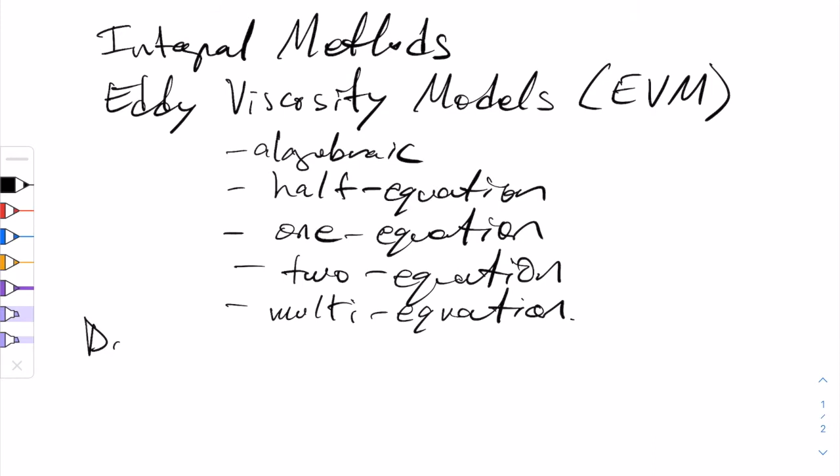Then there's a whole class of differential Reynolds stress models. And sometimes we might say there are algebraic ones, but we're not going to talk too much about that.

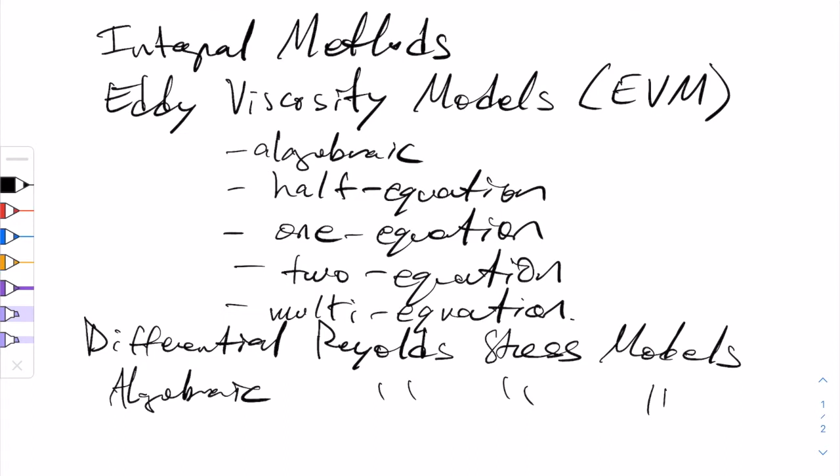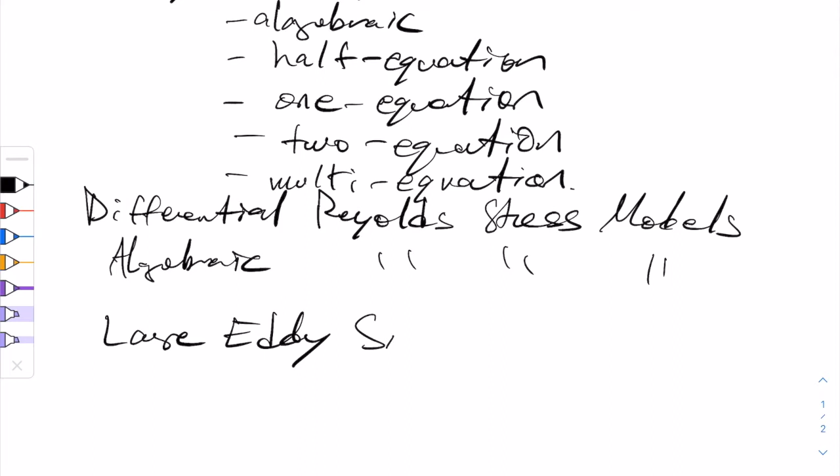Opposing these types of Reynolds-Averaged Navier-Stokes closures, there's a whole other class of models, which we'll lump into large eddy simulation. And of course, there are direct methods, numerical methods where there's no modeling—we just directly solve the Navier-Stokes equations. Those are called direct numerical simulation.

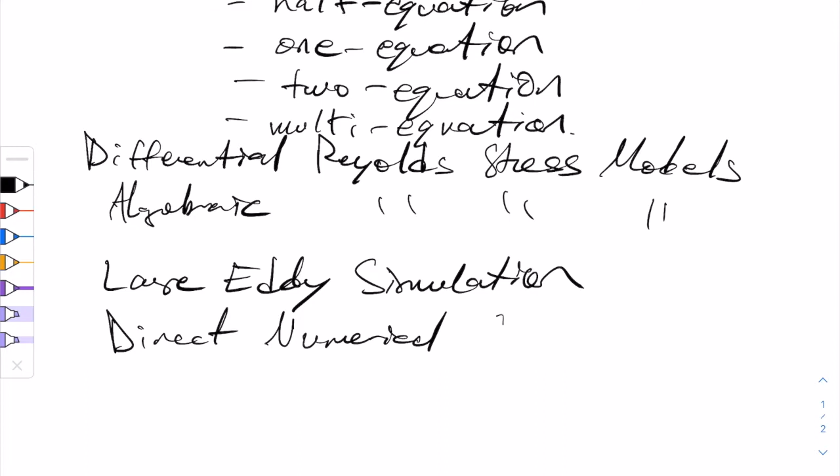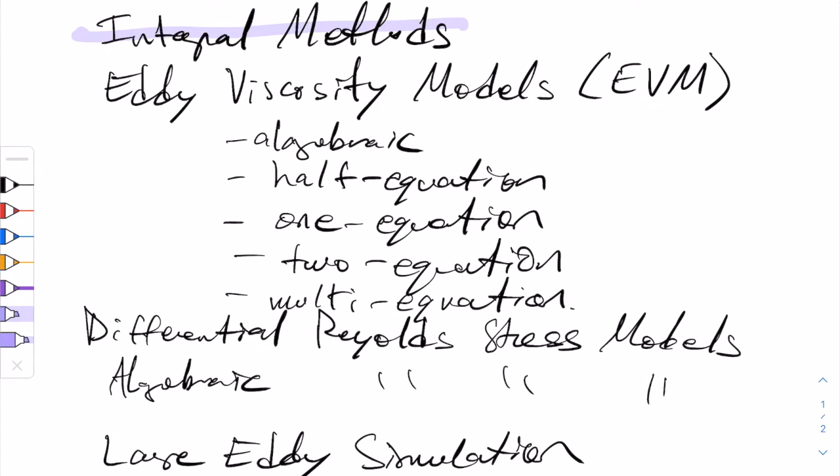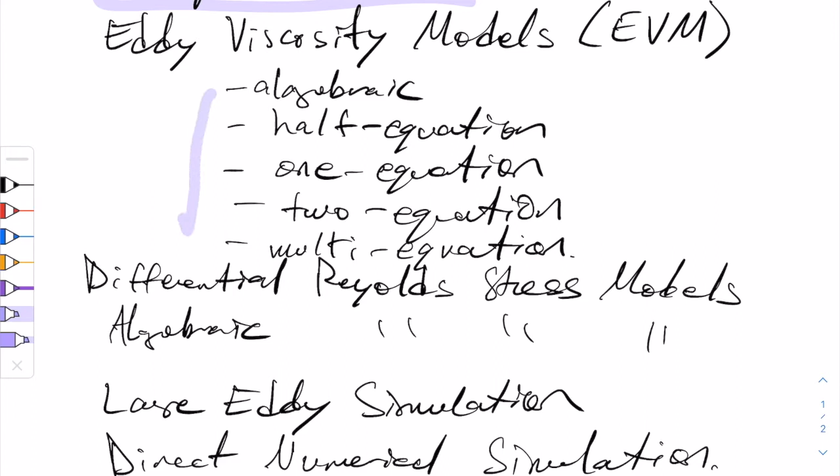Generally, in order of complexity, the integral methods are the least complex and run very fast, even on something like a small calculator or pocket phone. They become more complex as you go down the list. The Reynolds stress models are more complex than eddy viscosity models. LES usually requires supercomputers to run, and direct numerical simulations certainly need a very large supercomputer.

So let's talk about each of these a tiny bit to give you an overview, and in future lectures we'll show some of the mathematical details.

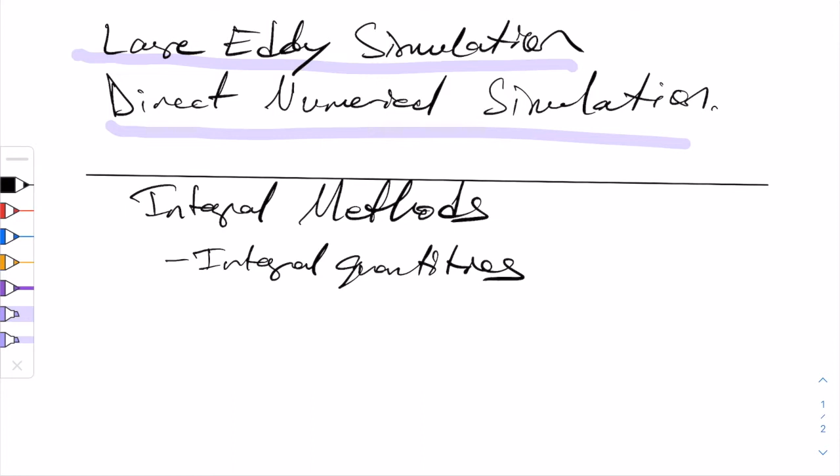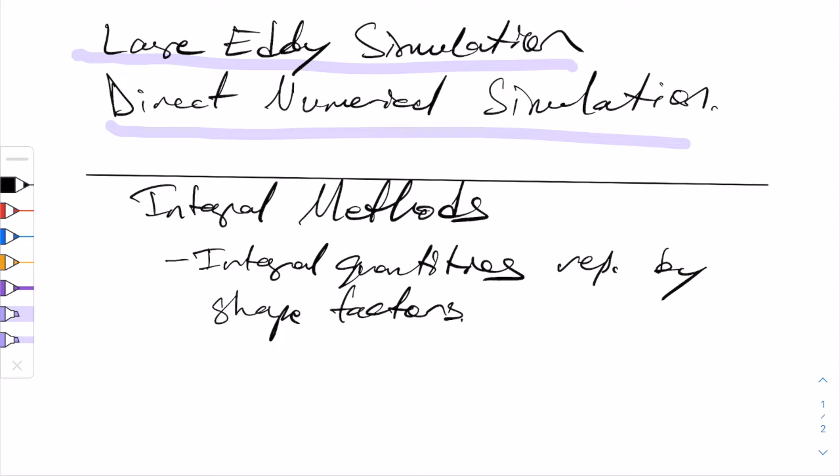So the first one is the integral methods. These are generally the most simple methods, and they do not explicitly cover the variations in turbulence across, say, a boundary layer thickness in boundary layer equations. They usually make use of integral quantities, which is where they get their name, and they're represented by shape factors. For those of you who've been through a traditional aerospace engineering course, you'll recognize the idea of shape factors.

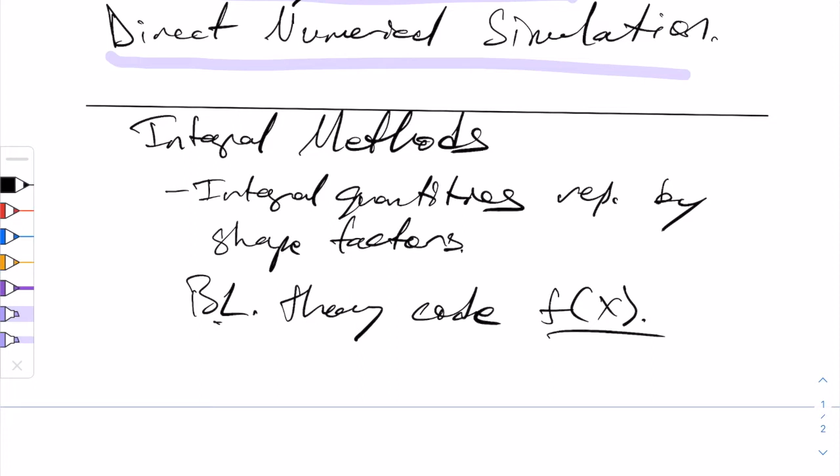They've even made their way into traditional boundary layer theory. The shape factor, like in a boundary layer theory code, will usually be a function of streamwise position, x. In this way, our traditional partial differential equations, which we derived earlier, like the RANS equations for particular flows and turbulence statistics, are replaced by ODEs—taking the PDE system and replacing it with an ODE system.

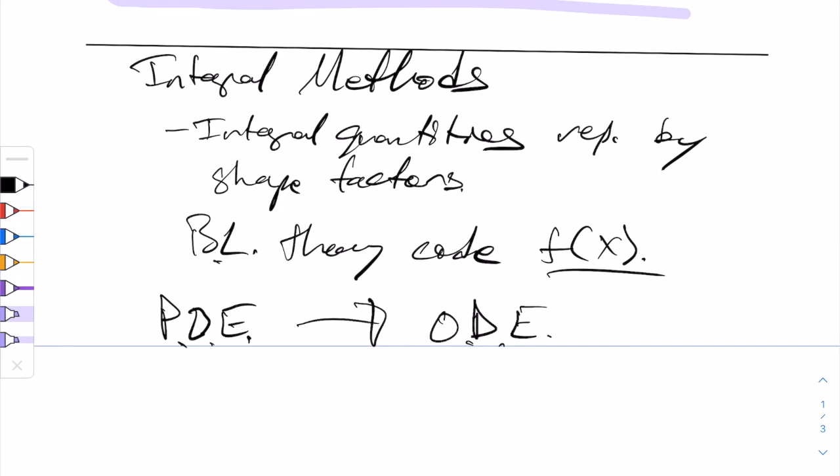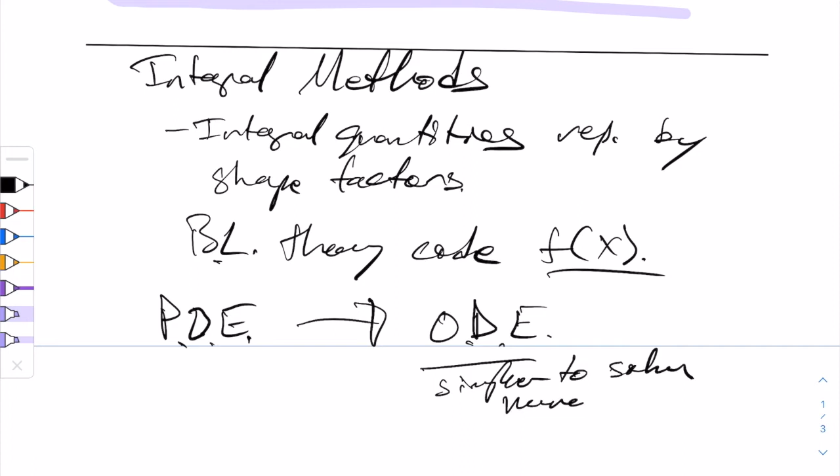And that's why it's so powerful, because certain ODEs might have analytical solutions, and ordinary differential equations are simpler to solve numerically.

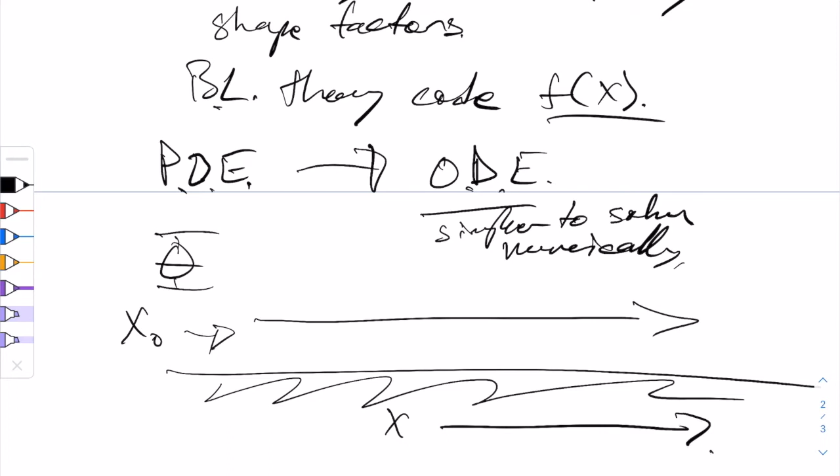If particular initial conditions are known at, say, x naught, in a boundary layer flow, and we go downstream knowing things like the initial shape factor—we'll call it capital theta—then all other quantities can be known downstream with increasing x, which is wonderful. So a simple ODE numerical integrator can advance our solution of given parameters moving downstream.

Now, the unfortunate part of these integral methods, even though they're fast, is that they are not very precise in modeling the actual turbulence. In fact, these methods might heavily rely on empirical relations of the integral parameters. They're extremely simple and fast, but that means they don't have much predictive capability outside their realm of applicable design spaces.

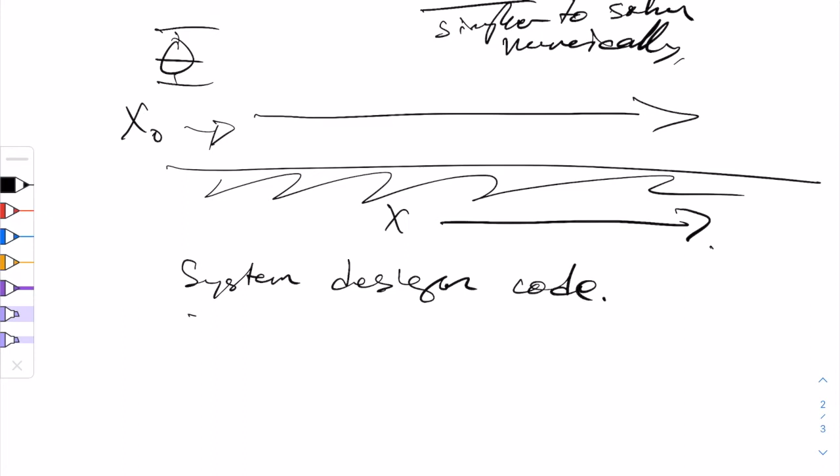This means, for example, we might be able to define and create a complete airfoil or simple fuselage in a systems design code, but you can't expect to recover exact turbulence statistics and make it a predictive model of flow. That's really the first type of model that tries to account for turbulence in a numerical method that was fast for aeronautical design.

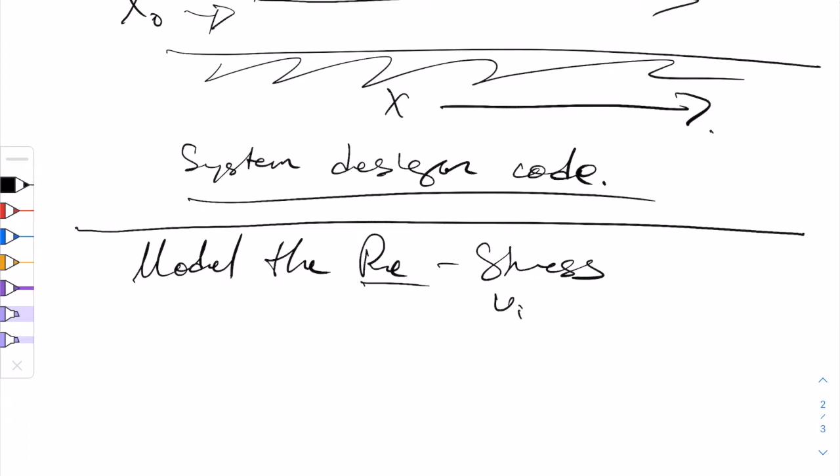Now there's a number of more useful methods where they still try to solve the PDEs, but they need to model the Reynolds stress—I'll write it as RE stress, which as you remember is UI, UJ, prime, prime, bar. The first classification of these models will be eddy viscosity models.

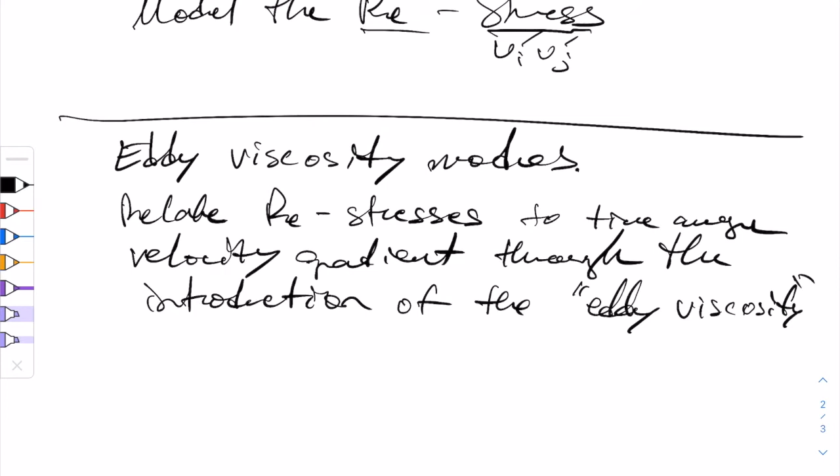The Eddy viscosity models relate the Reynolds stress, actually all of them, to the time averaged velocity gradient through the introduction of the so-called Eddy viscosity. So just like we have a traditional viscosity of fluids, there'll be a new effective Eddy viscosity, which is like an additional viscosity due to the motion of the turbulence. You might also think of this as a turbulent viscosity. So we'll write the kinematic viscosity as nu, and we'll write turbulent viscosity, or the Eddy viscosity, as nu sub T. So this is the traditional viscosity, and this is the turbulent viscosity. That's what you're seeing when you see these types of models in your computational fluid dynamics code.

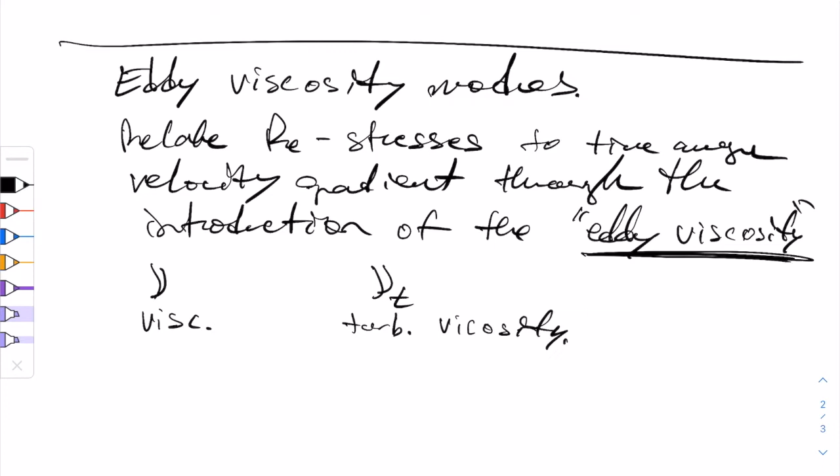Let's make the most simple Boussinesq type Eddy viscosity model. We'll write the Reynolds stresses, negative ui uj prime prime bar, is equal to the Eddy viscosity. There's our model, so this is a model, we're just writing it down: partial ui, partial xj, plus partial uj, partial xi, minus 2/3 of the turbulent kinetic energy times delta ij.

Now, we'll call this equation 21 in our class series. In this equation, on the left-hand side, we have the negative of the Reynolds stress. The right-hand side is the Eddy viscosity, which is unknown. It can vary in space and time, only in space if it's a steady model. We have our velocity gradients.

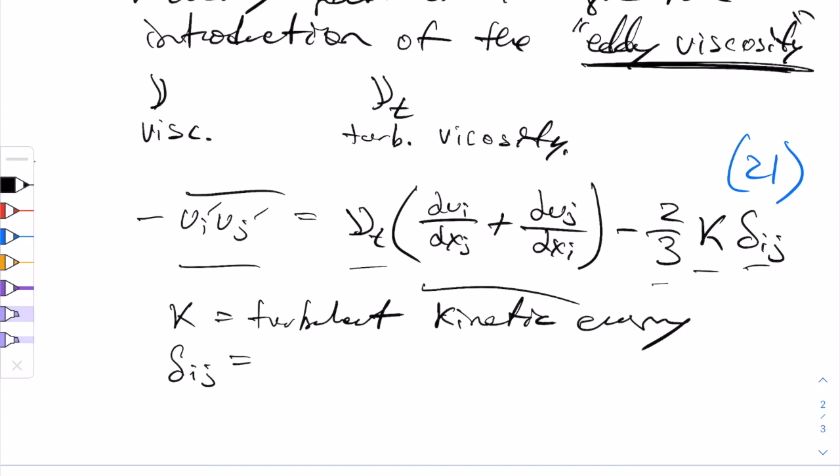We have 2/3 K, remember, K is the turbulent kinetic energy, and we derived the transport equation for that previously. And delta ij, we talked about previously, this is the Kronecker delta function. If i equals j, it is 1, and if i is not equal to j, it is 0. Typically these subscripts i and j vary from 1 to 3 integers.

Now you'll notice the last term in this particular equation right here. Let's look at that, and you'll see that the negative 2/3 k delta ij term is introduced at this location to make the whole equation consistent when the trace of the Reynolds stress is taken. Remember, the trace of the Reynolds stress goes as the turbulent kinetic energy.

And doing the continuity equation when j is equal to i in the first term on the right-hand side, we'll see that it goes to 0 because partial ui partial xi from 1 to 3 is 0 if it's an incompressible flow. So by setting j equals i, we can now correctly recover the expression: negative ui prime prime bar equals negative 2k, of course in 3 dimensions.

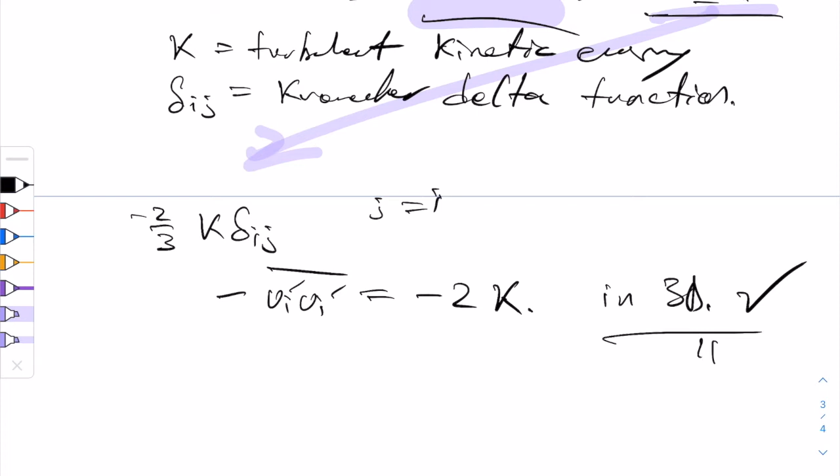That works perfectly, and we're quite happy. So that's part of where this equation comes from. We're setting it so that K is equal to the trace of the Reynolds stress, and we've introduced this eddy viscosity term for the off-diagonal terms so that there's some sort of extra viscosity due to turbulence. So that's the model.

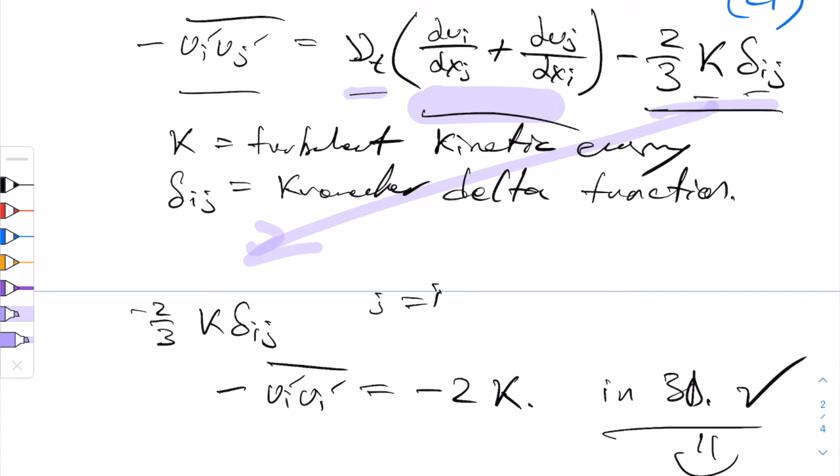And of course, we have to come up and try to find how now this new variable, nu sub t, varies within the flow. What if we make a boundary layer assumption?

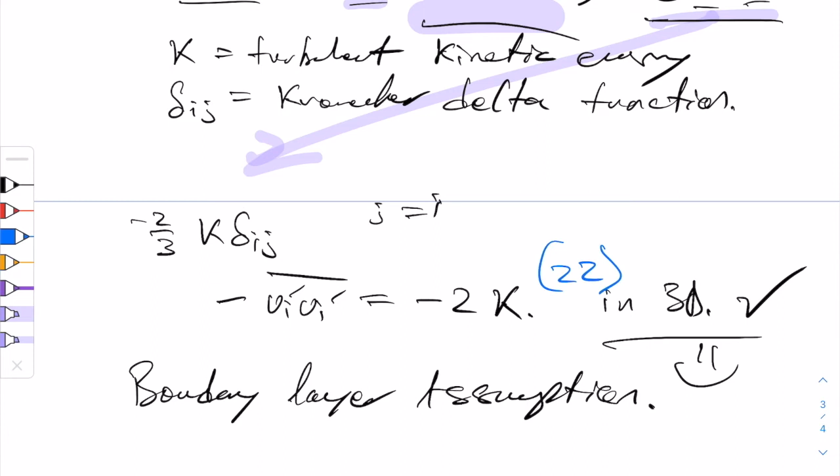For the general eddy viscosity model, what happens? Well, we make the same type of assumptions like we did earlier - and I forgot to label this equation, I want to label this equation 22, right there in blue, sorry about that, that way I can go to 23 in my notes. We'll make the assumption, just like we did in the previous class, that the flow is 2D, and the u component velocity is much larger than v, and only gradients in the y direction really matter, and they're very small in the x direction, and it's steady in 2D.

Okay, so if we do that and look at equations 21 and 22, what do we get? Well, we'll get negative u prime v prime bar equals nu t times partial u partial y. So this is our new eddy viscosity model relating Reynolds stress with eddy viscosity. It's only the gradient of u, which is the velocity component in the x direction, and y is the cross-stream direction.

What happens to the other components of the Reynolds stress? Well, u prime squared bar will be equal to v prime squared bar by definition. It's equal to w prime squared bar, which is equal to 2/3 of the turbulent kinetic energy. That's wonderful. So within this eddy viscosity concept, we can indeed assume that there's an analogy between the turbulent transport and molecular transport.

We'll emphasize that this particular analogy is in contrast to the typical molecular viscosity nu. So this whole thing is not an analogy with nu. That's not equal to nu.

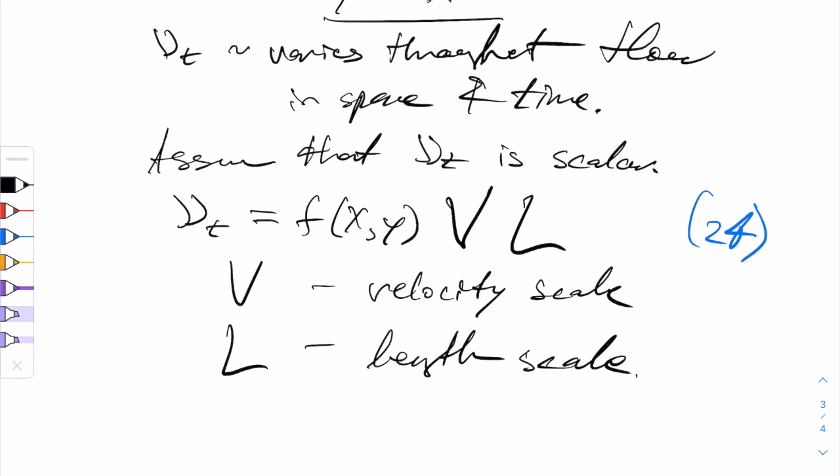These don't vary like in a turbulent cascade if you studied turbulence theory. We also assumed in this relation that it's steady. Because if it was unsteady, then F would be a function of X, Y, Z, and T, for example, in three-dimensional unsteady flow. So the question becomes, what should V and L be?

It so happens that we can talk about the different models and their classifications through this way. I should also mention, for this to be dimensionally correct, we would want F to be dimensionless. So what would V, L, and F be?

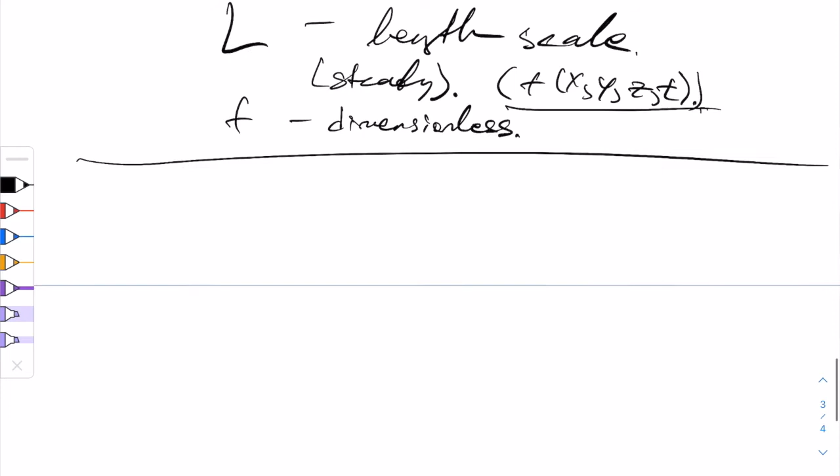In the first classification of models, there are indeed algebraic models. And in algebraic models, there will be algebraic expressions for L and V. These are algebraic, that's why they're called algebraic models.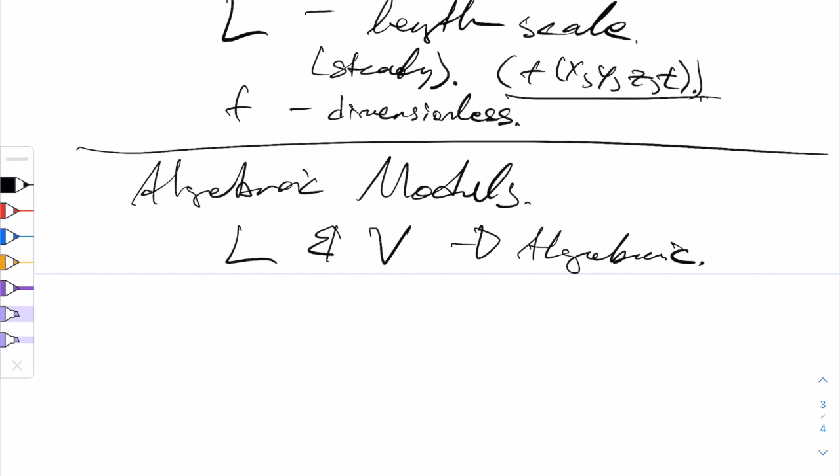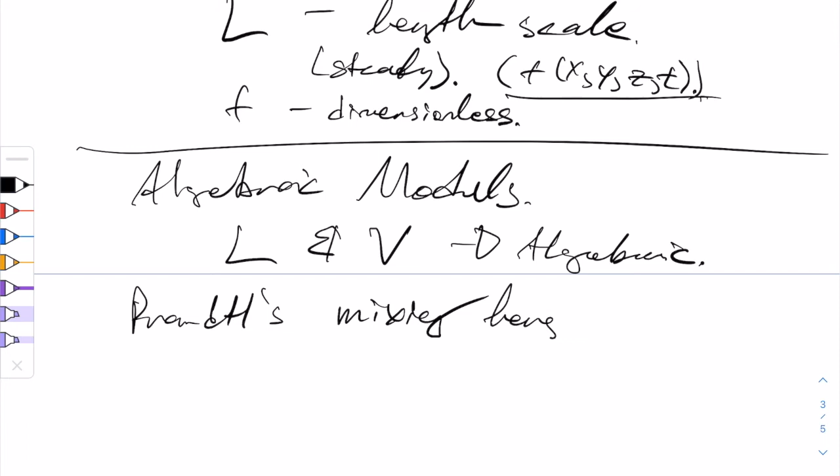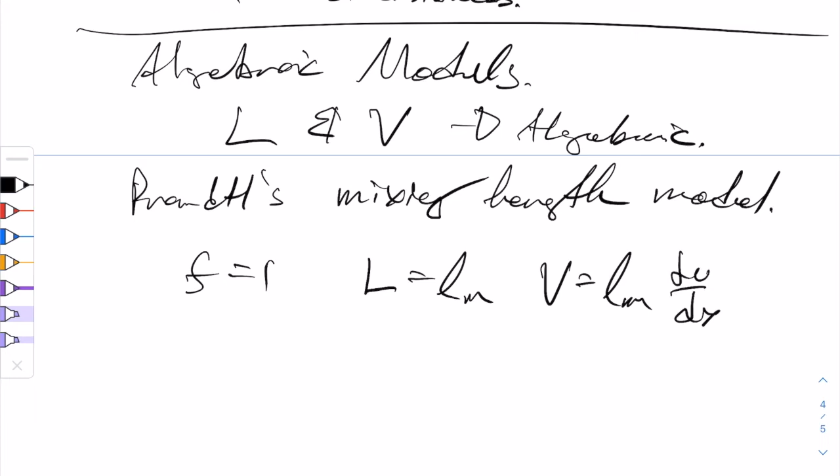Perhaps the most well-known algebraic model is Prandtl's mixing length model, named after Ludwig Prandtl, one of the greatest fluid dynamicists who ever lived. This sets F equal to 1, L equals some length scale we'll call L sub m, and V equals L sub m times partial U partial Y. This is an excellent model for a simple attached incompressible boundary layer flow.

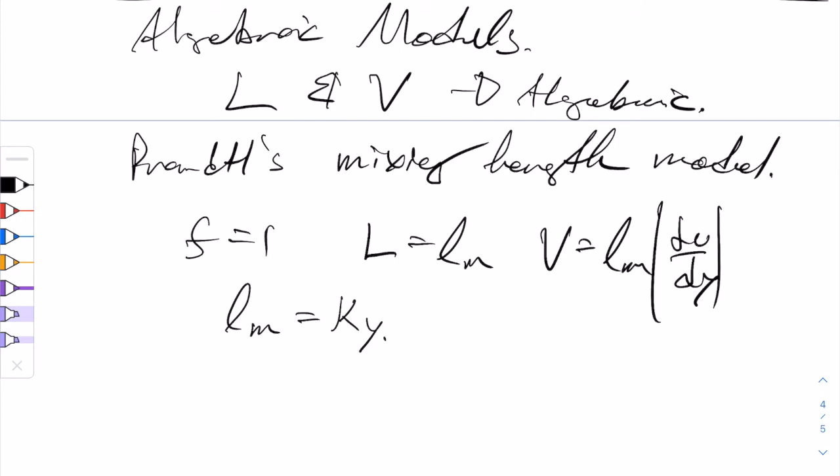Now, we still haven't said what L sub m might be. Perhaps we can say L sub m goes as some constant, we'll call it kappa, times y. So for a boundary layer, there's the distance from the wall y, and the streamwise direction x. You can see our velocity goes as the length times the magnitude of the derivative of the velocity in the streamwise direction with respect to the wall normal direction.

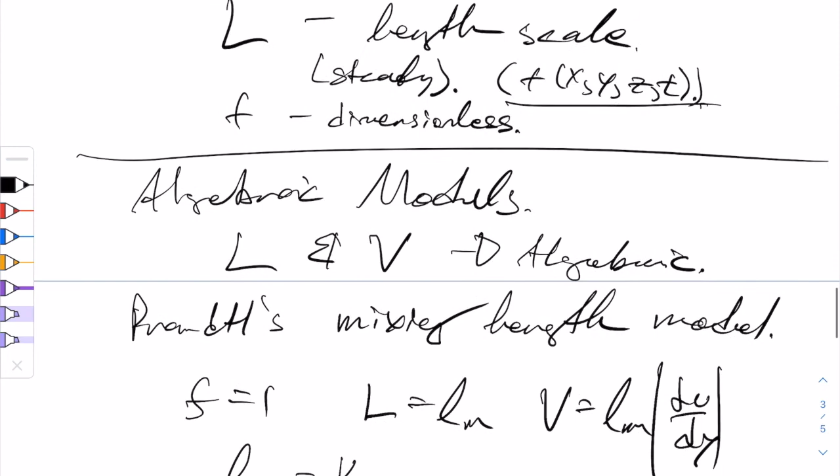L is a length scale, which we just say goes as a constant times the distance to the wall, and F is 1. So that way F is 1, but we're still letting our length scale and velocity grow. The length scale grows in a linear way, and the velocity grows in a nonlinear way.

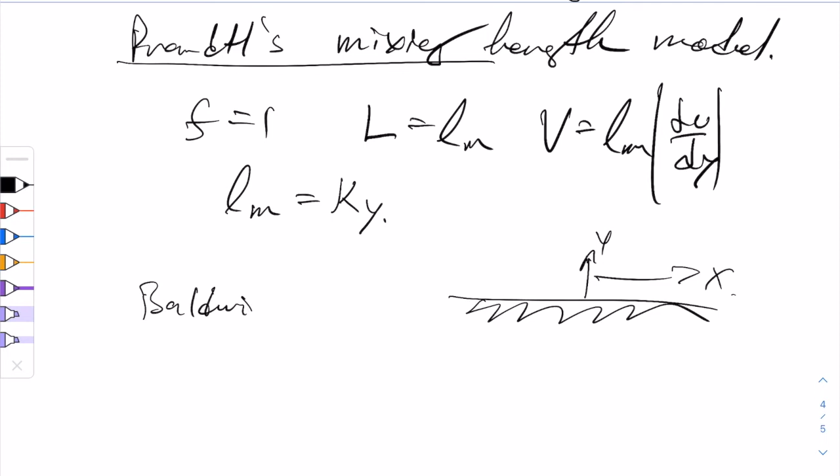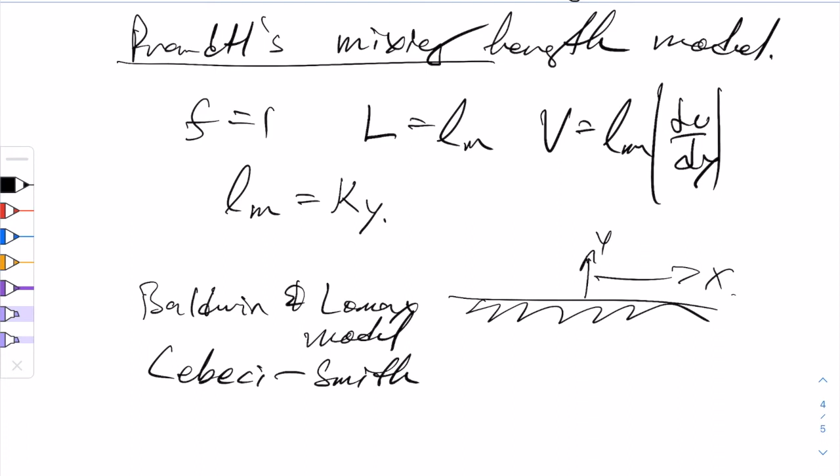There are other well-known models. Two of the most famous ones after Prandtl's are the Baldwin and Lomax model, and of course the Cebeci-Smith model. We will outline these models in later sections.

The next interesting model is the so-called half algebraic models. We'll call these half algebraic models. Perhaps the most famous one is of Johnson and King. We'll talk about this later.

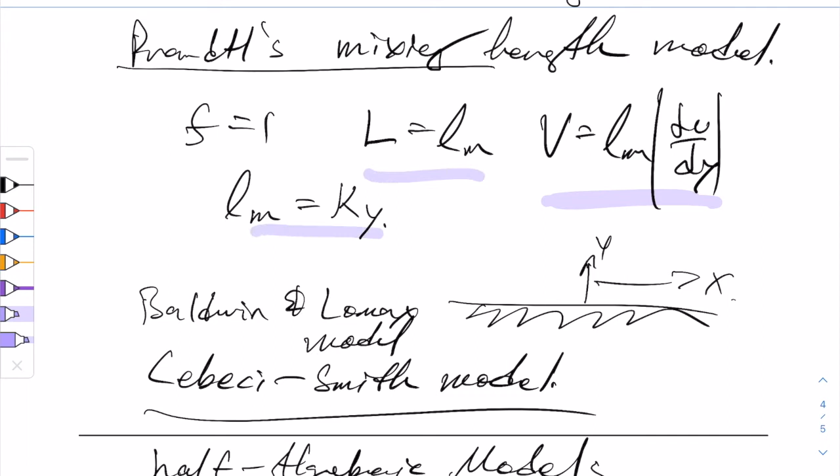This is referred to as a half equation model because, in addition to the algebraic relations, it also solves an ordinary differential equation for one particular quantity related to the turbulent velocity scale, capital V. So it's like replacing the capital V term in Prandtl's model with a differential equation relation, while retaining the algebraic relations on the other part of the model. That's why it's called a half model or half algebraic model, because only part of it is solved through a differential equation.

Those are really not used much today, except for large-scale calculations, and you won't see them too much. A lot of people today in their professional CFD codes use RANS closures involving one or two equations.

Let's look at the one equation model. We'll show all the details of these models later on. I'm just giving you an overview and classification. So the one equation model, besides the algebraic expressions, will solve one partial differential equation for the turbulence.

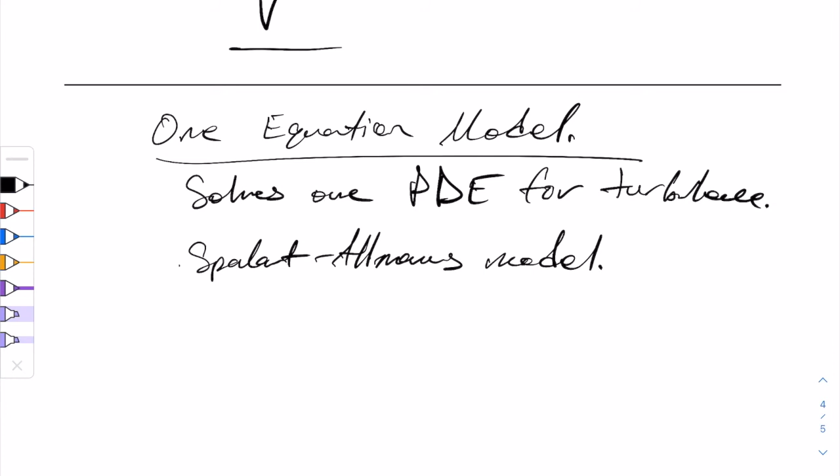Partial differential equation for turbulence. There are lots of famous examples. Today, probably the most famous one is the Spalart-Allmaras model, and that's in almost every industrial and government CFD code in the world.

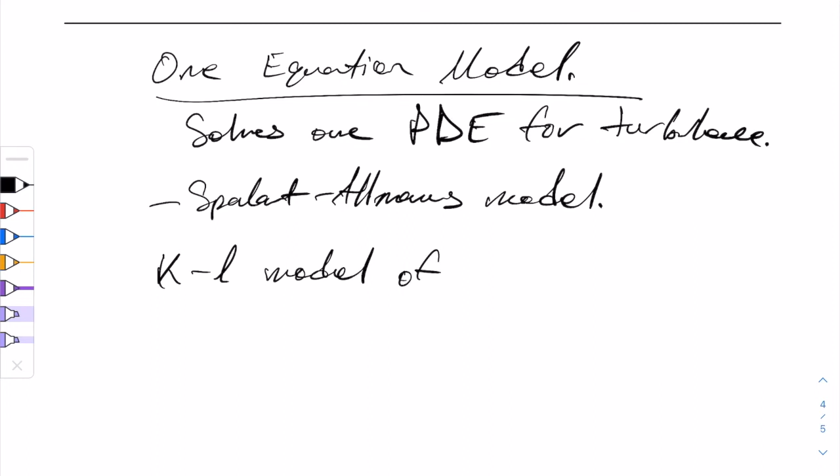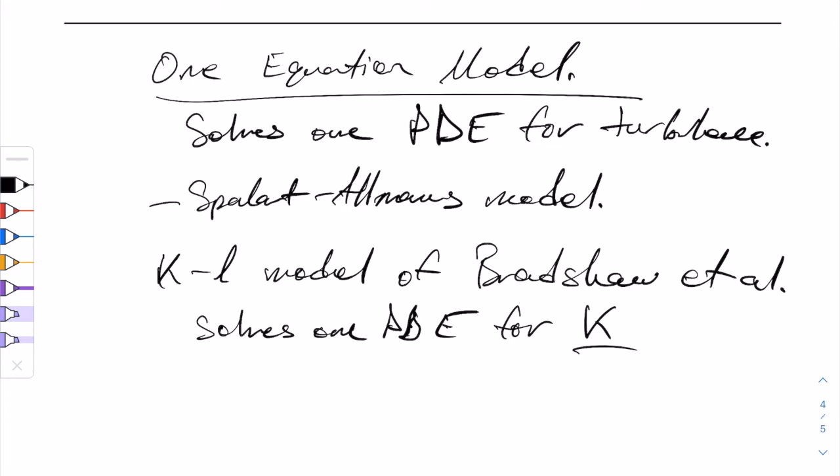Perhaps another extremely well-known but less used one-equation model is the so-called KL model of Bradshaw and his collaborators. We'll show this model later on. It solves one PDE for turbulent kinetic energy, K, which we showed earlier, and it solves an algebraic equation for the length scale, L.

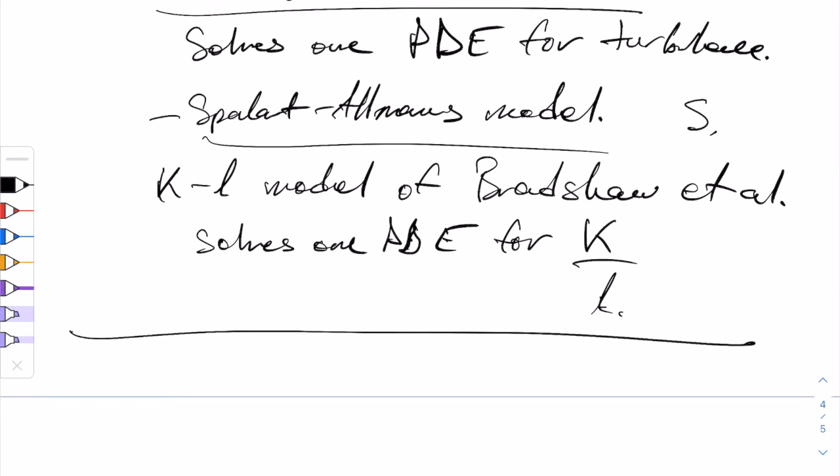Now, the Spalart-Allmaras model actually solves a single equation for a parameter S, which isn't really particular K or L. Anyway, that's enough about the one-equation models. We'll look at particular forms soon.

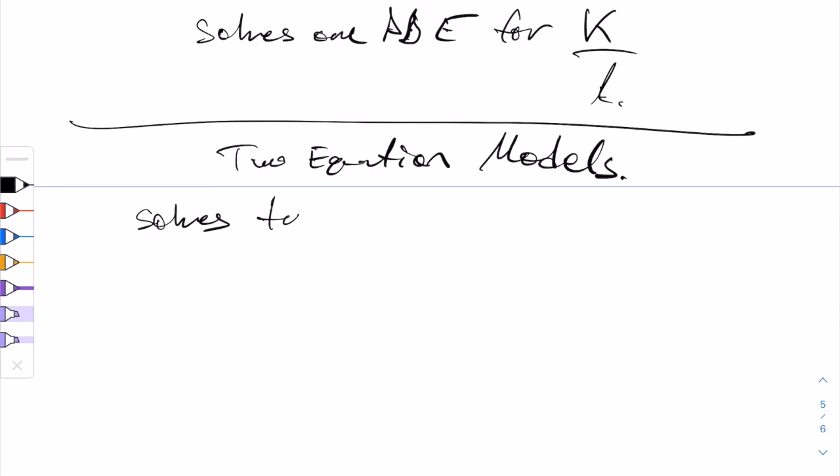Let's look now and talk about two-equation models, which are more expensive. As you guessed, a two-equation model solves two PDEs, partial differential equations, for closure for the turbulence. So we're closing the RANS equations with two additional partial differential equations, and sometimes additional algebraic equations and simple constants. So these are an interesting class of models, and they're very well known.

There are two types which are mostly known. One is the K epsilon model. The K epsilon model solves one equation, one PDE for K, and of course one PDE for epsilon. Turbulent kinetic energy is K, and epsilon is, of course, dissipation of turbulent kinetic energy.

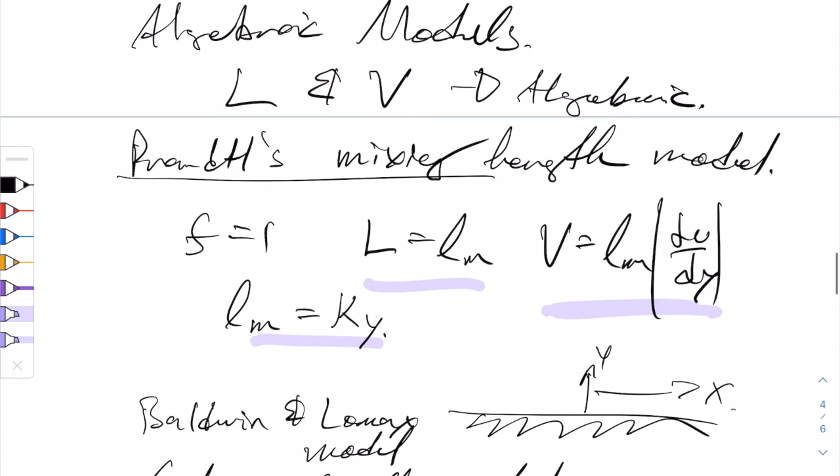So if we look for K and E and look for the dimensions with respect to equation, say, 24, which we wrote up here, we will say, and you can think about it for a second, but you'll see that V equals K to the 1/2, right? Because K has meters squared per second squared units. And L will be K to the 3/2 over epsilon, which of course gives you the units of meters, right?

And this is meters per second. You can easily discover what this is. This is meters squared per second squared, 3/2 power, all over meters squared per second cubed. And that gives us meters, so the dimensions should check out. It's that simple if you put it in that way.

If we substitute these two relations into equation 24, we can get a new simple relation for the Eddy viscosity, which can be used to close the model, of course. Mu T equals C sub mu of K squared over epsilon. Here, C sub mu is usually a constant, which is calibrated against a particular experiment or well-known analytical result, if it's possible to know one.

You might say, well, C mu might also be interpreted as a function of x and t. If it's steady, of course, t goes away. Typical values of C mu in practice we find to be 0.09. So if you're using a professional CFD code and you bring up a K epsilon solver and you would find the Eddy viscosity from K squared and epsilon, you'll see that C mu is there, 0.09. You might also see that in the literature of the particular models.

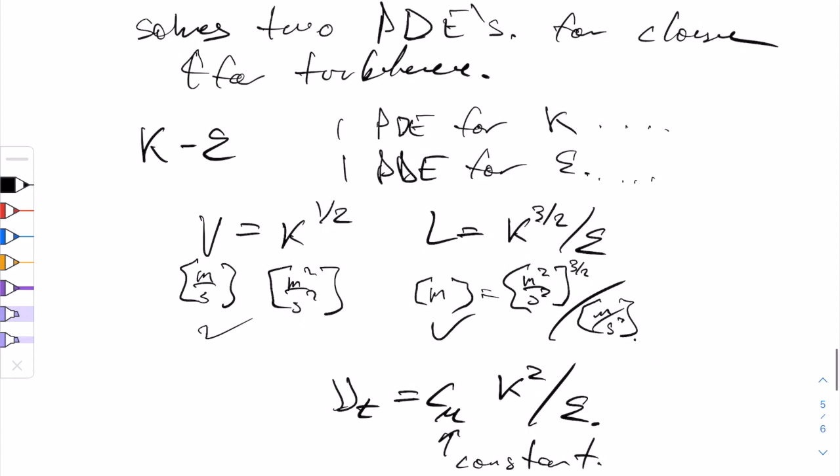I've already mentioned that there's the K epsilon model and also the K omega model. The K omega model was originally proposed by the academician Andrei Kolmogorov in the Soviet Union. The K epsilon model was proposed by, I believe, von Karman and Prandtl at different times. It can be argued about who proposed it first. But certainly the K omega model might be seen as a little more physical, in my opinion. But nonetheless, we'll get into that later and show examples.

So the K omega type model is also two equation, of course, meaning it solves one equation for K, just like the K epsilon model, and also one equation for omega, which is specific dissipation. So omega is specific dissipation of turbulent kinetic energy, and we'll define that in a second. So how is this related to equation 24? Oh, and I wanted to label this equation 27, excuse me.

Okay, I will say that omega must be proportional to epsilon over k based on dimensional analysis. And then we'll say v is once again k to the 1/2 power, just like the model of k epsilon. And therefore, for dimensionality to be correct, we'll say L is, of course, k to the 1/2 over omega. So omega should have the dimensions of 1 over seconds, if I'm correct. This is in meters, this is in meters per second, and I think all the dimensions check out.

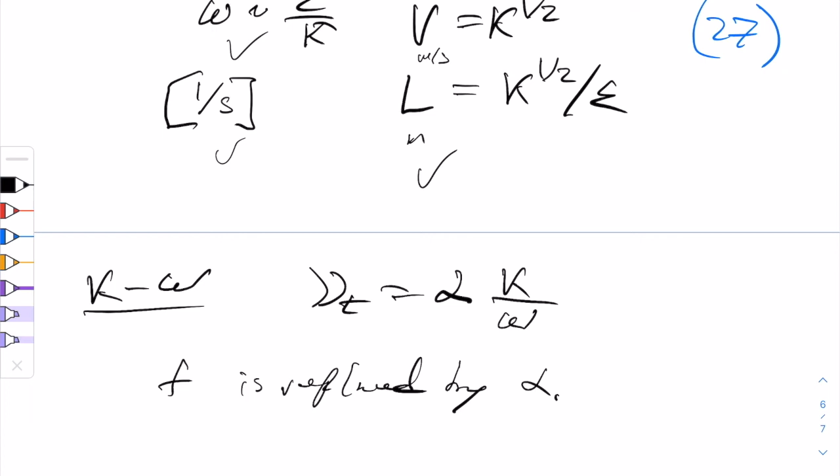There's also other two equation models, and they might also be k-L or k-tau. This is a turbulent kinetic energy length scale model or turbulent kinetic energy time scale model, where L and tau are just going to be single time or length scales. So instead of relating the length scales and velocity scales explicitly, you can actually create differential equations for them. These types of models are less popular.

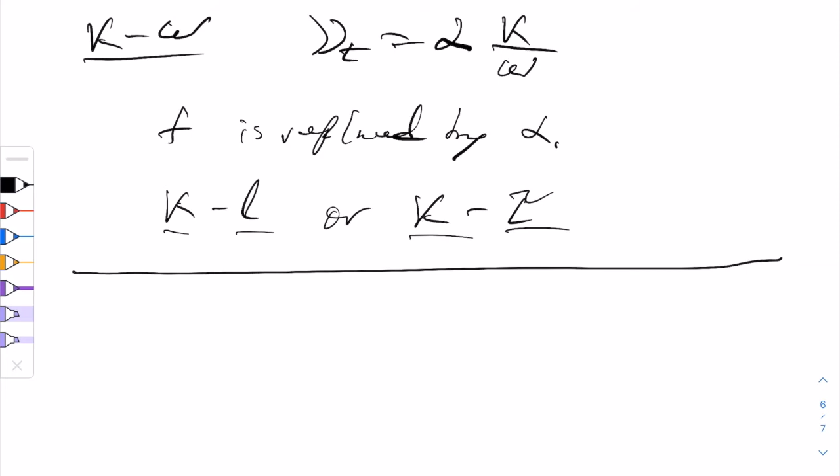Let's make some notes about these types of models. First we'll note that all these two equation models can absolutely be transformed into each other, and there's just certain advantages or disadvantages for using different forms, and people in the turbulence community discuss them at length. For example, the k epsilon model might be transformed into a k omega model through the relation of epsilon equals k omega. In fact, if you find a solution of a k omega model, you can easily try and seek the dissipation by multiplication through k. Sometimes there's some constants in here depending on the model formulation. So you have to be really careful about what your model constants are for your flows to be able to convert from one type to the other, or even derive other types of data.

There's particular restrictions on these models. Let's just list a few out here. First of all, you can see all these eddy viscosity two equation models depend on a linear relation between the Reynolds stress and the gradient of the velocity field. So of course we can relax that assumption and make it nonlinear, and there can be discussions about that, and no doubt particular types of fluids or theoretical fluids that break these rules.

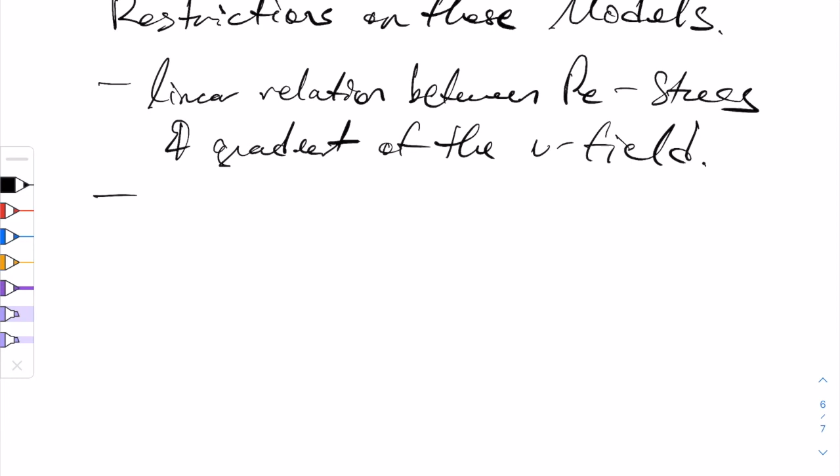And we also assumed a scalar characteristic of the eddy viscosity, and that may not be true. It is an assumption, a good one for many types of flows. We assumed there's only one velocity and length scale in the models. And there's certainly types of models which use types of spectra or multiple length scales or velocities, but these are kind of exotic and you won't see them too much in a production computational fluid dynamics code. Finally, the so-called anisotropy is not explicitly accounted for.

And then you saw in our boundary layer calculation, we had u prime squared equals v prime squared equals w prime squared equals 2/3 k. So that type of turbulence model doesn't contain anisotropy of the turbulence, and we're not even really calculating these quantities. We're only calculating k. So we have no idea about what the anisotropy is in a boundary layer type flow predicted by this model. But we know from measurement that boundary layers are certainly anisotropic, especially within the boundary layer turbulence. So if flows are more complex than, say, just simple shear layers that are steady and incompressible, then these types of forms are going to break down.

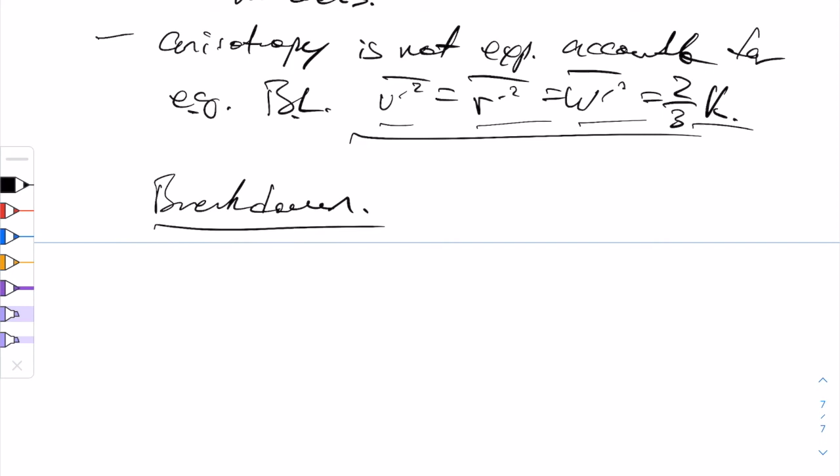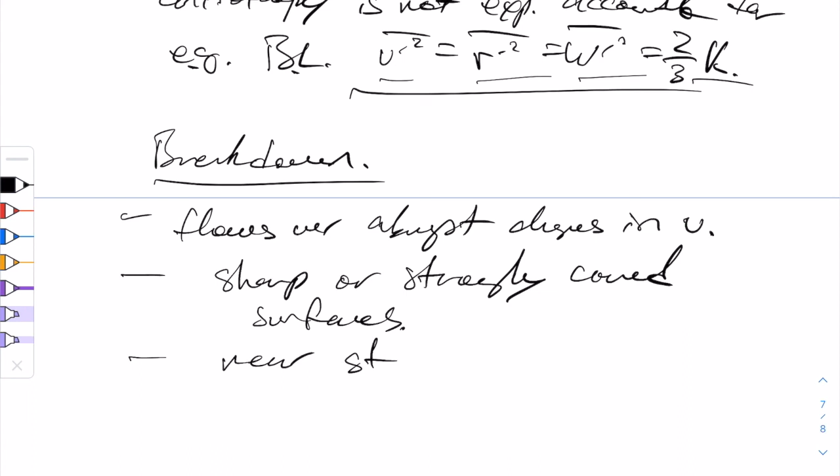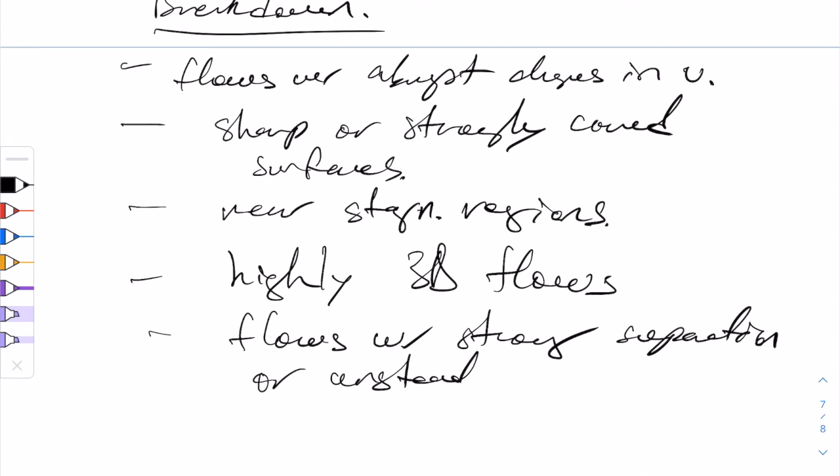And just some examples of flows where these assumptions are breaking down, we'll give them here. For example, flows with abrupt changes in U, which is a lot of types of flows. Say sharp or strongly curved surfaces - that's another great example. Sometimes near stagnation regions, right, where flow stagnates. Highly three-dimensional flows. And maybe flows with high unsteadiness, like shedding and separation, or unsteadiness. Uh-oh, that's a lot of types of flows I can think of.

Especially when boundary layer flows separate, these models themselves aren't really conducive. There's even a lot of research today in development of models that accurately predict transition of flow from laminar to turbulent and also predict where separation occurs. These types of models usually use our third major class, which we'll talk a little bit about, and these are called the so-called differential Reynolds stress models. And this is where we're not necessarily solving for a transport equation for K.

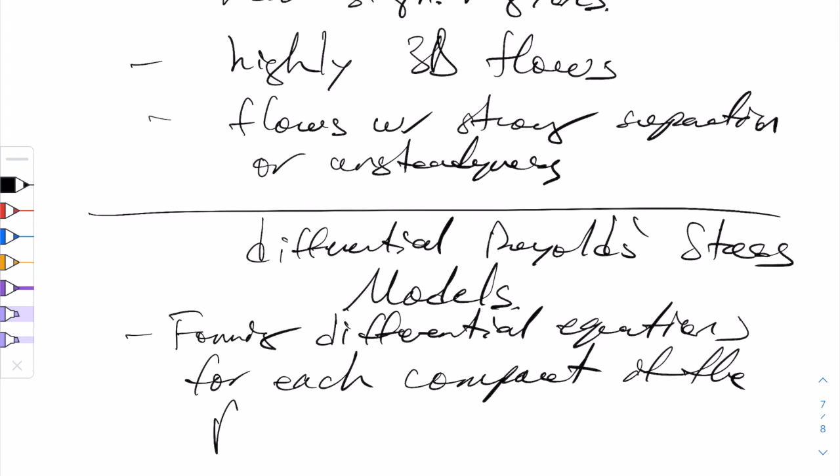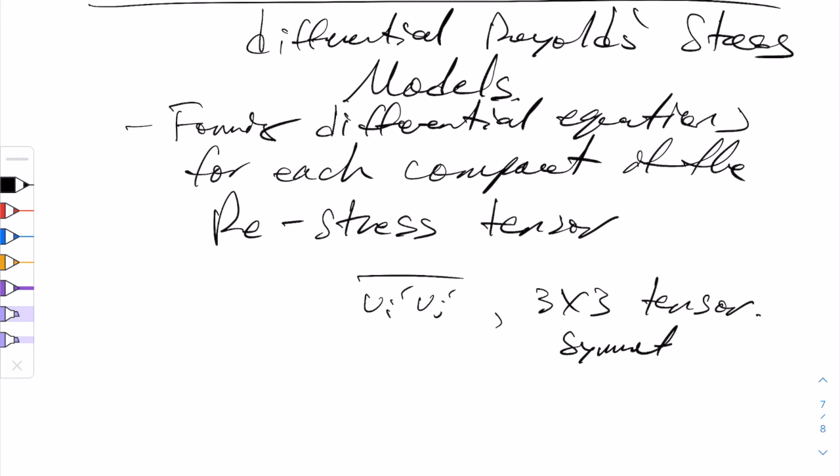We can still do that, but we're forming differential equations for each component of the Reynolds stress tensor, which is Ui prime Uj prime bar. This is of course a 3x3 tensor, and it has the property, usually for most fluids we're interested in aerospace, of being symmetric. So it has 9 components, and since it's symmetric, there's really only a need for 6 differential equations to model each of the components.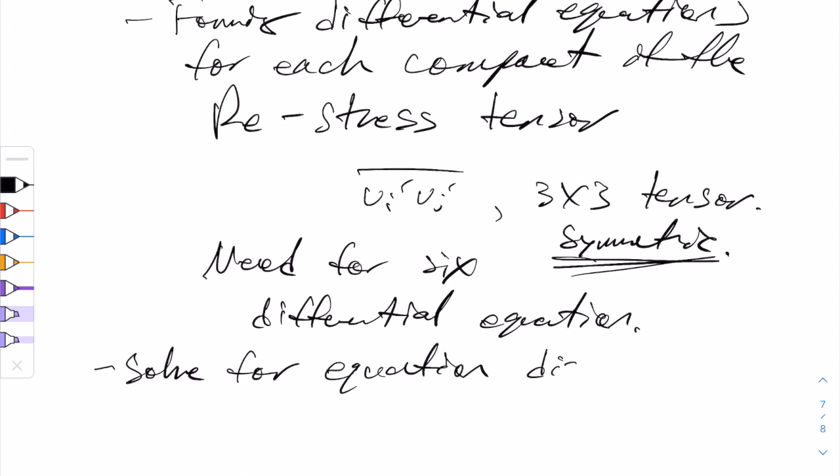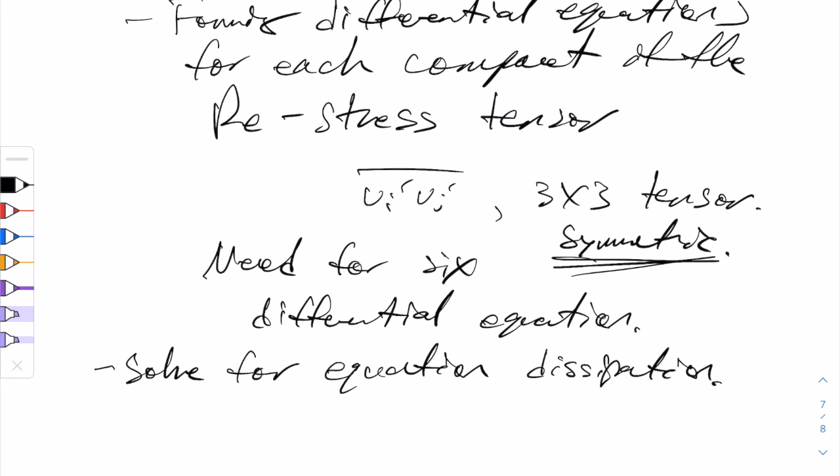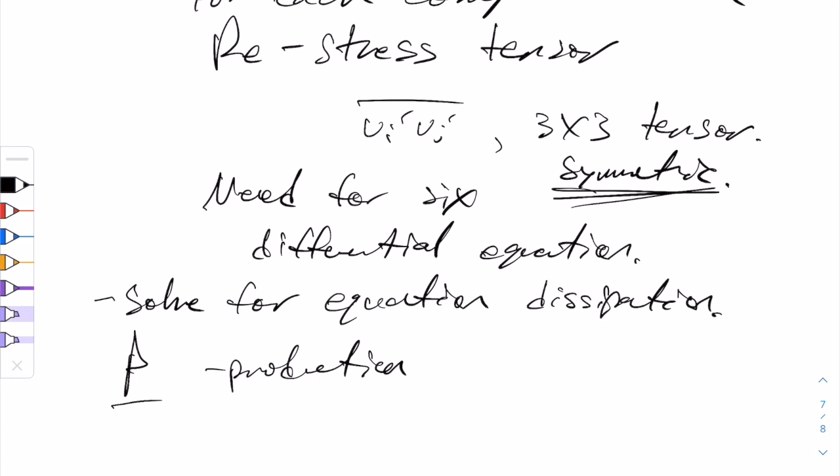Of course, these models also usually have to solve an equation for dissipation. Just like our 2 equation models have to solve for K and epsilon, these models have to solve 6 differential equations for the trace and off-diagonal terms of the Reynolds stress, and another equation for dissipation. One of the good things about this approach is that we don't necessarily have to worry about the production of turbulent kinetic energy through P, as you remember from previous lectures. Therefore, we don't have to worry about some of the drawbacks of the typical K epsilon, K omega models.

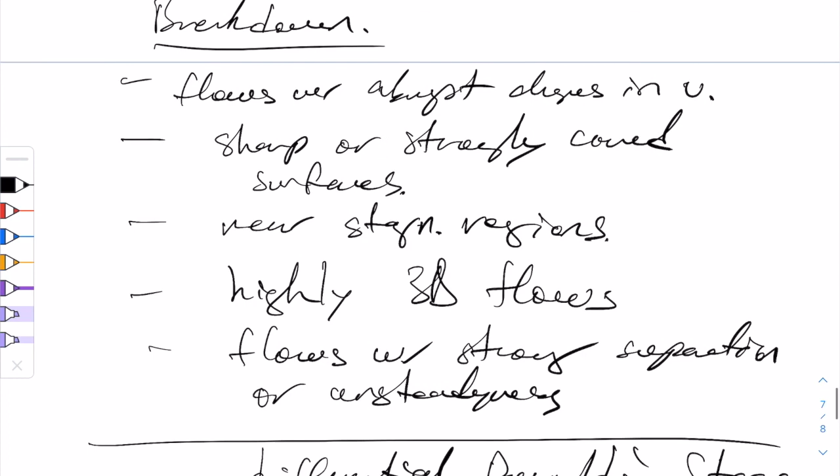Now that's the big overview of the RANS closure models that I'm going to cover, and I might add a few extra over time, maybe looking at some more contemporary models from articles. But you should also know there are other avenues of turbulence modeling, and we're looking at RANS-based closures in this series of lectures. I already mentioned large eddy simulation.

Which I'll just call LES. LES is just what it means: you're only using the computer to resolve, through a filtered set of Navier-Stokes equations, the largest scales of turbulence. So we might draw these as large scales of turbulence in a chaotic field, with a length scale L, and we're resolving scales like integral scales and smaller scales. But tiny little scales of turbulence, we're not resolving those with the numerical simulation—we're modeling them. So in the big picture, LES resolves numerically the largest scales, and models with turbulence theory and empirical closure the smallest scales.

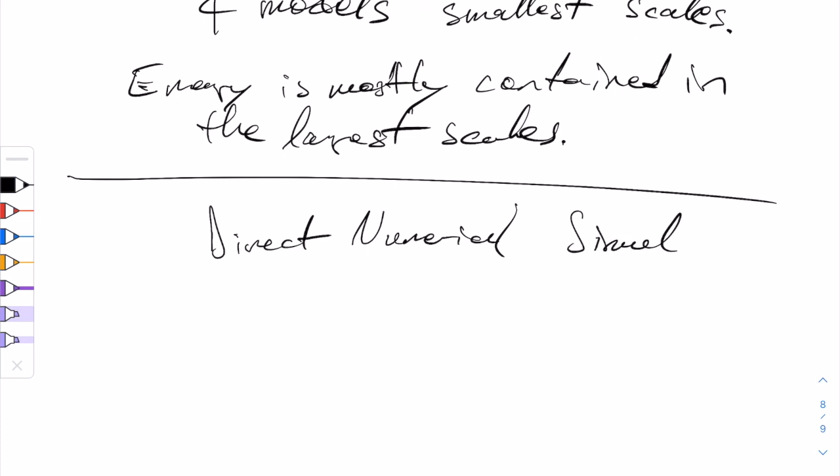And of course, there are mixtures of LES and RANS called detached eddy simulation, which are specialized things you can look more into. I also wanted to mention quickly something some people like to get into, mostly for research, which is direct numerical simulation, DNS. This is where we simply use classical or maybe advanced numerical methods to directly numerically evaluate approximate solutions.

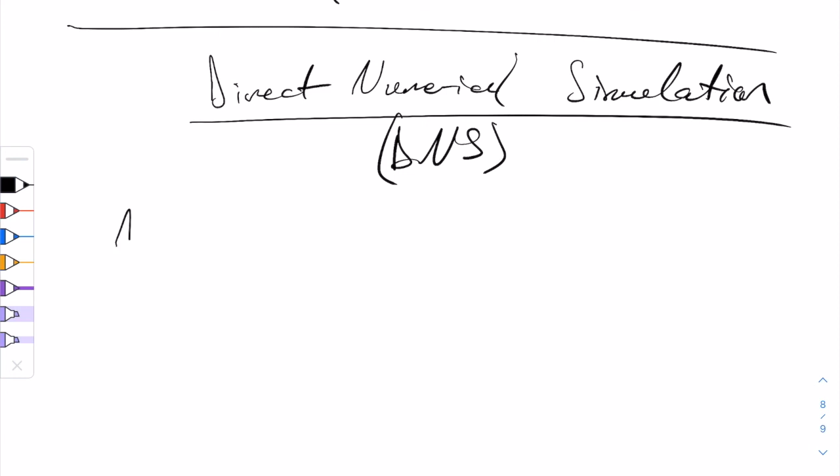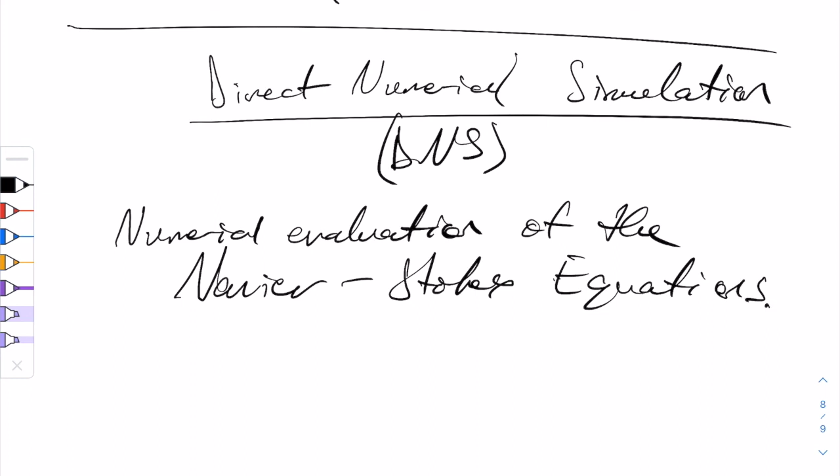As numerically accurate solutions of the Navier-Stokes equations. So this is just numerical evaluation of the Navier-Stokes equations, and maybe a gas law and energy equation if it's compressible—if incompressible, just Navier-Stokes. It's usually done for research, and since you're not doing any modeling, not RANS, not LES, or any other exotic technique, these are the most expensive approaches. But the nice thing is you get a time-dependent, three-dimensional solution, though you'll need a supercomputer to resolve high Reynolds numbers.

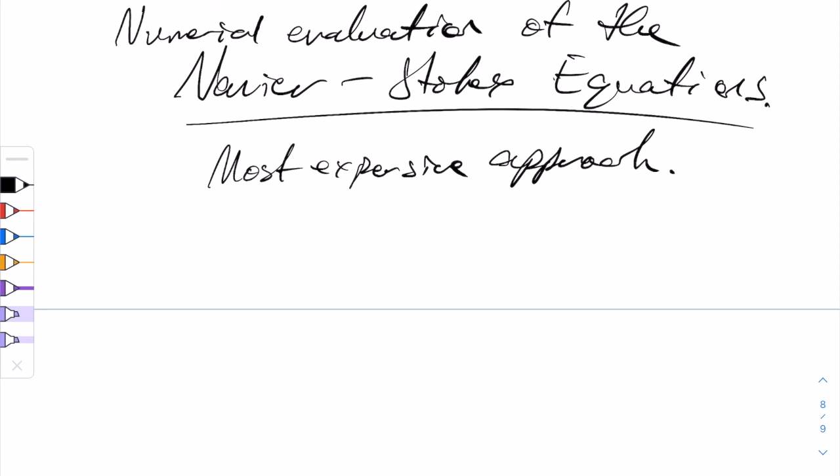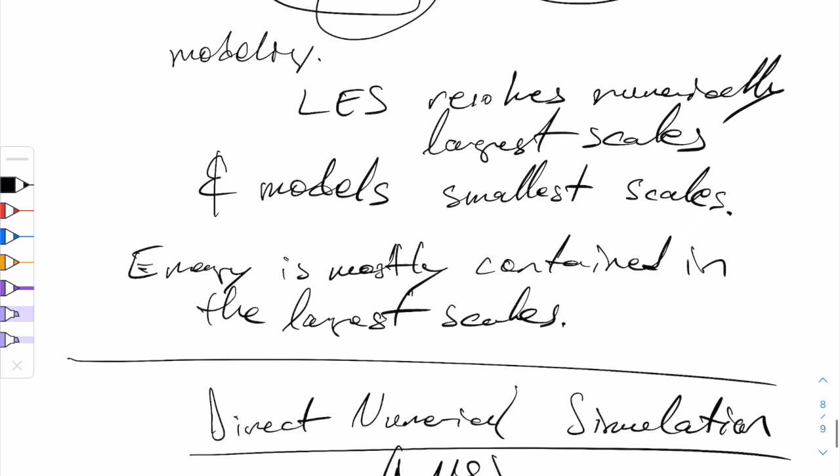And it remains an area of research which will likely be around for the rest of my life. So today we talked about some of these classifications of models: zero equation or so-called algebraic models—used interchangeably—half equation, one equation, two equation, the differential Reynolds stress, and there's also something called algebraic Reynolds stress. We talked a little about large eddy simulation, which isn't the focus of these talks, and of course DNS, which also isn't the focus. But just be aware that they're there, and one avenue many people go down today is LES instead of RANS. In these coming lectures, I'm going to try to highlight some of the most famous models in the classical RANS categories and show you their terms and some of the physical thought behind their formulation.